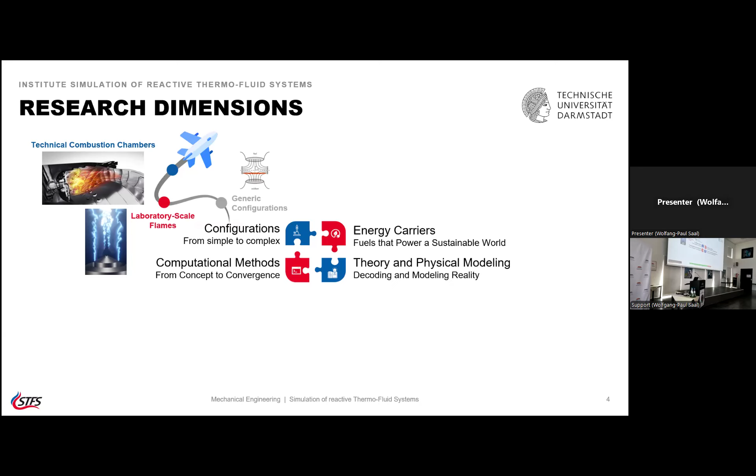We look at this for various energy carriers - fuels that power a sustainable world. They can be solid, liquid, gaseous, and also metal. Metal, of course, is a solid, but can also become liquid and gaseous in a flame. Today, I'll mostly talk about hydrogen as one of the most prominent energy carriers for future energy conversion and transport for the chemical industry. Hydrogen is a key component here.

The way we do this is by computational methods, from concept to convergence. Today I'll mostly be talking about HPC, quite obviously at a ParCFD conference. But all this computing power doesn't help you if you don't understand the theory behind it, the physical understanding. Today I'll mostly talk about direct numerical simulation and a little bit about large eddy simulation of reactive fluids. This is what we're going to talk about.

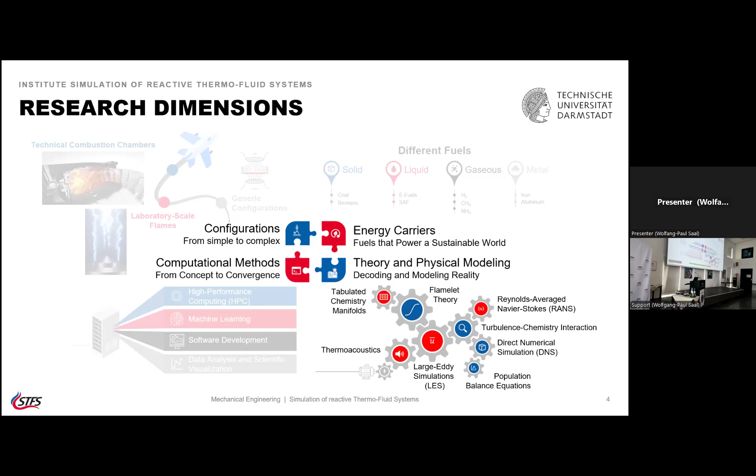Then I thought, how do I structure this talk? With the messages I want to carry across, I have four key messages and four parts to my talk. The first is: how has reactive CFD catalyzed combustion, coming both from fundamental research up to product development, looking at real systems? Then, since I want to talk about hydrogen, I need to answer: how can hydrogen help combat climate change? Why is it important for the energy transition? That's the second part.

The third part is that we're facing almost disruptive change when it comes to computer hardware, so the question is how the next generation hardware can be exploited to answer the scientific questions we have. This brings me to my fourth key message: how can HPC accelerate, in a sense, time to solution or time to scientific discovery, for hydrogen combustion. So these are the four things I want to talk about.

Let me start with what has happened in reactive CFD - a little bit of a view back at where we are and where we need to go. Now, reactive CFD - you heard I was also in industry, but now I'm back for more than 14 years. I'm back to academia now.

Reactive CFD is an important part of computational engineering in a broader scope. For me, computational engineering consists of two parts. The first one is that I need physical understanding - that's a little bit of the engineering part.

In terms of combustion, you need to understand how a flame structure looks like. For example, you have a thin layer, 100 micrometers thick only. How does the temperature evolve from 300 Kelvin to 2000 Kelvin over a distance of 100 micrometers? How does species evolve? How are pollutants formed? All these things - you need physical understanding to do this.

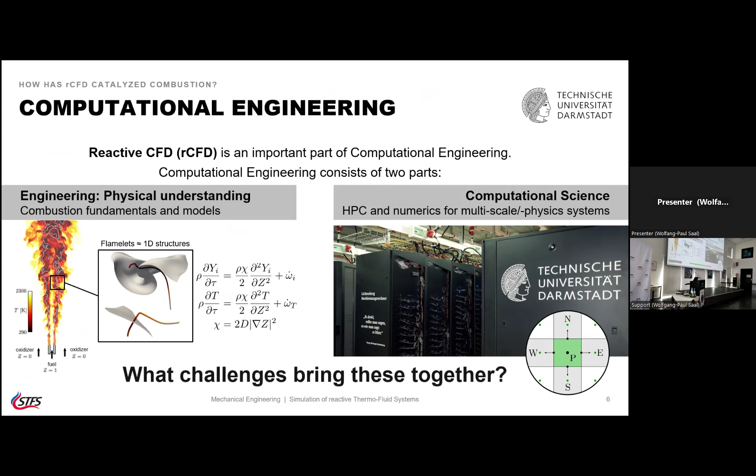And of course, you need the bridge to HPC. You need special numerics, and in the case of combustion, you really need numerics and HPC methods that can deal with multi-scale and multi-physics systems. Since probably many of you are more in the non-reactive CFD part, I'll try to explain a bit what our challenges are in reactive CFD - these are the challenges that bring these two things together.

Now let's look at a real aero engine - that's an LES of an aero engine. One that is actually flying, probably not designed by CFD, that's a Rolls-Royce BR710. You see here an LES, not a DNS, of these temperature fluctuations.

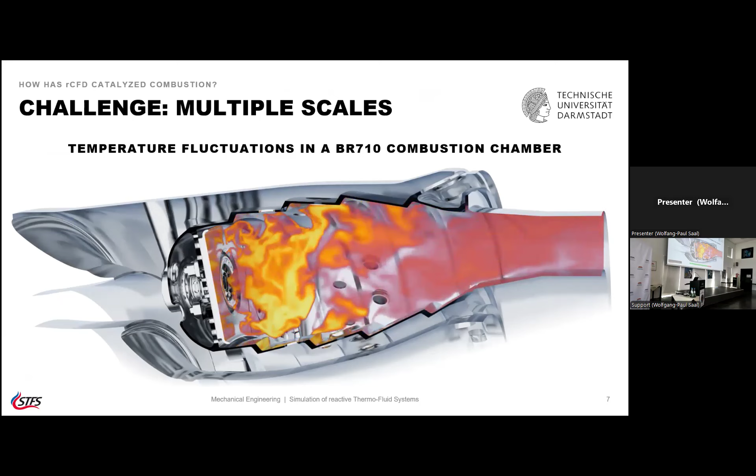Now of these real systems, meter size, you want to look at what scales are involved. Let's look at the different scales at a temperature snapshot here. When I look at the combustion part - let's say that would be our LES grid - you look at flame thicknesses, that's where the entire combustion physics takes place. We say that's a flame thickness, and under these conditions, that's 100 micrometers or sometimes even smaller.

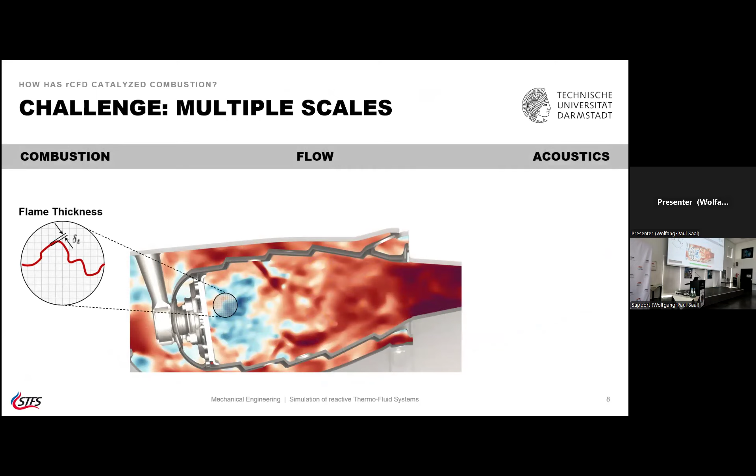Now you compare this to the fluid mechanics scales. In fluid mechanics and turbulent flow, we usually say the smallest scale we have are Kolmogorov scales. What you find under technical conditions is that the Kolmogorov scales are usually much larger, or at least larger, than the flame thickness. So everything in terms of physics that happens in a combustion scenario happens below the Kolmogorov scale.

So in terms of resolution, when you go for a DNS of a turbulent combustion system, it's not sufficient to go to Kolmogorov scales - you need to bring another 7 to 10 grid points into the reaction zone. That's why a combustion DNS and a typical fluid mechanics DNS have different restrictions. Keep that in mind.

But on the other end, this isn't just about resolving - as a CFD person you'd be used to resolving in a DNS from Kolmogorov to the integral scale, but sometimes that's not enough. If you look at thermoacoustics, you get physical wavelengths that are beyond the integral scale, so these are sometimes also scales you have to resolve. In terms of multi-scales, combustion is really fascinating - sometimes it also gives us a lot of headaches, but in terms of scale separation, that's quite a challenge.

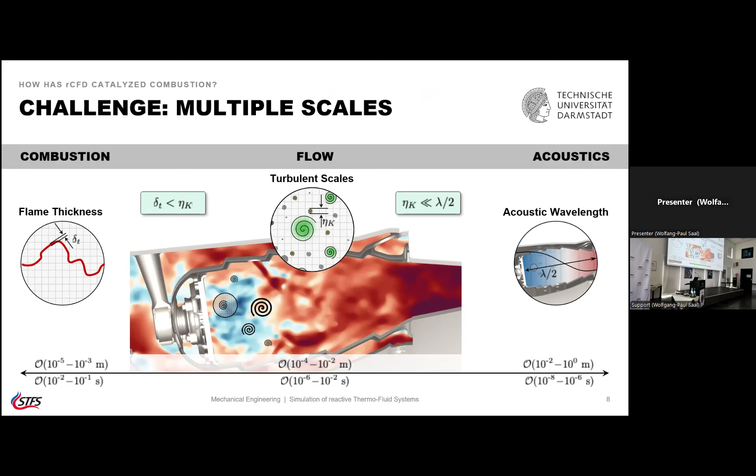The smallest nanoparticles that you get here are around 1 to 2 nanometers, the first subparticles that you get. So this is also something you have to resolve.

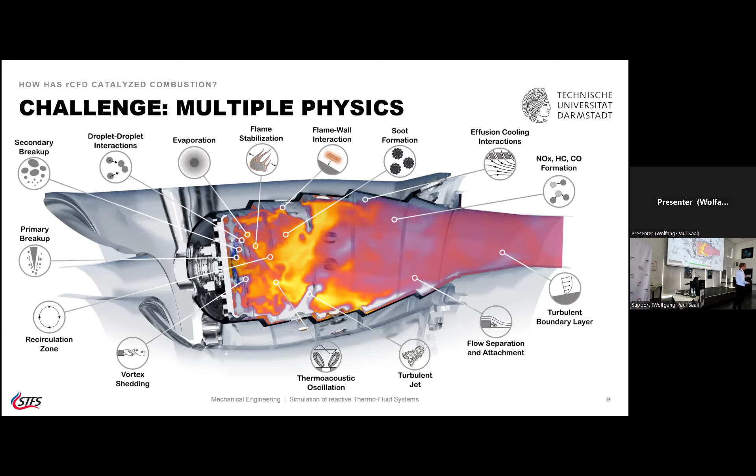Now looking at how you can do this, I said this at the very beginning, you want to make sure you have a systematic approach. So we start with fundamentals, really basic research, where you understand in laboratory type flames what the turbulent flame structure is. Then having learned a bit about turbulent flame structures, you go into something application oriented, like a combustion chamber that operates under pressure but you still have optical access. You can still see the flame. You go in with laser diagnostics and you can simulate this and validate step by step your models, because in the end, if you go to industry relevant configurations like the one you've seen before, you cannot validate a model in such a configuration.

You don't have the data to do this. You can evaluate whether the model is fit to do this, but you cannot validate a model. So the validation part goes here, and here it's more evaluation, looking if it can solve a practical issue. So this is really an engineer's type of workflow where you go from simple to complex, looking at all these unit problems, and all of this needs a unit test in a good software framework to handle all of these things.

So this is where reactive CFD is, and that has been developed over decades. This is not something one single person can do, but the entire research community has been working on this, and now we're at a point where it has become an indispensable tool for both fundamental research and product development. It's a multi-scale and multi-physics process.

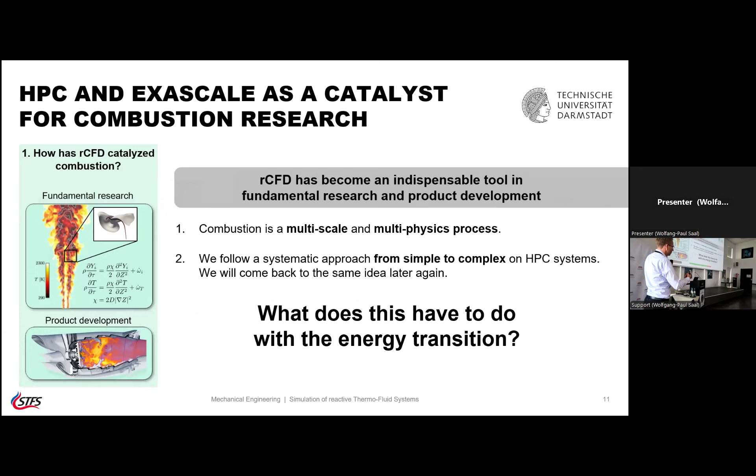Well, the question is, all of that talk didn't say anything about the energy transition. So that's the next thing I have to explain a little bit, where this becomes important. Now, the energy transition and the hydrogen part is my key message 2 and 4. So let me talk first about hydrogen and how hydrogen helps in the energy transition that we're entering into now.

There are tons of numbers, tons of politicians giving you insights on what needs to be done. We all have consensus on what needs to be done - reduce the use of fossil fuels - but there is no consensus on how we do this. There is, however, the International Energy Agency, which is widely accepted, and they put out numbers every year. This is called the World Energy Outlook. Now let's look at what they're saying.

If you look at the so-called stated policy scenario, this is what we already implemented to do, and you look at what the energy composition is in 2050 - that's the year where we want to be net zero, net zero CO2. That's the big goal, in order to limit the temperature increase. So this is really what we do.

And if you look at 2050, you see, don't want to go into all the details, but there's oil, natural gas, and coal. So these are fossil fuels, and this is one thing you want to get rid of if you want to combat climate change. So this is what we already do.

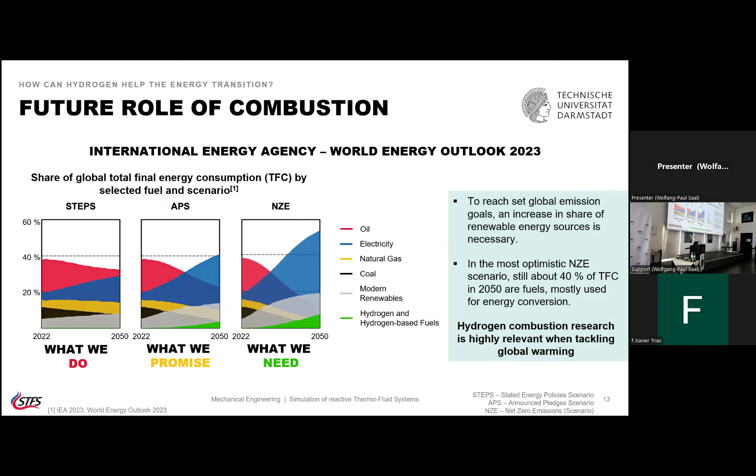That's not something that will be a niche at some point. That's really of high economic relevance. Seeing that hydrogen and hydrogen-derived fuels are growing, it's very relevant to look at this. So combustion is not going to phase out. Combustion is in fact becoming more and more relevant these days, because we're not talking about improving a little bit of 1% efficiency anymore. It's about designing systems in a disruptive change to work with hydrogen. So it's really an engineer's dream. You could start with a white piece of paper and do everything new.

One example is hydrogen-powered engines by 2035. That's the promise Airbus made. So by 2035, we're going to fly with hydrogen. This was just launched a couple of years back, and there's also a roadmap in between.

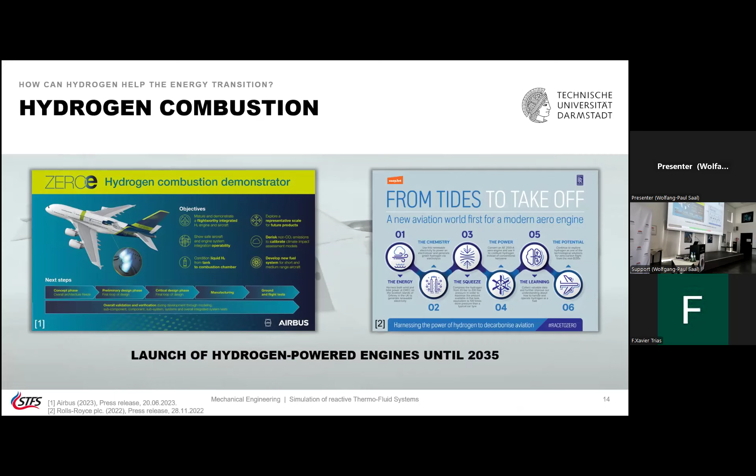When we started working with Rolls-Royce on these systems a couple of years back, we didn't even know whether we'd burn the hydrogen pre-mixed or non-pre-mixed. So you really start with a white piece of paper, knowing that in 15 years we have to fly. That's what I tell my students - that's an engineer's dream. It's not about talking to people who say we always did it this way and don't want to change. Here, the change is disruptive, and that's where engineers are needed.

So when you say hydrogen - everybody had basic chemistry - you could say hydrogen is the smallest molecule. That's where you start with hydrogen on the periodic table of elements. So H plus H is H2. That should be a simple fuel, and the chemistry, in fact, is not so complex compared to other fuels.

But hydrogen is highly reactive - you know this from basic chemistry class maybe. We usually measure this with laminar burning velocity, which is the front speed of a flame moving through a stagnant, pre-mixed medium. And you compare this to methane.

Here's how much fuel to air you have - one means stoichiometric conditions, here you have more fuel, here less fuel than needed. For methane, the basic ingredient of natural gas, you have limited flammability limits and a fairly slow flame. With hydrogen, it basically burns all over the place - whatever you mix, it burns, and it burns very fast. This also comes with safety implications around explosibility and things like this.

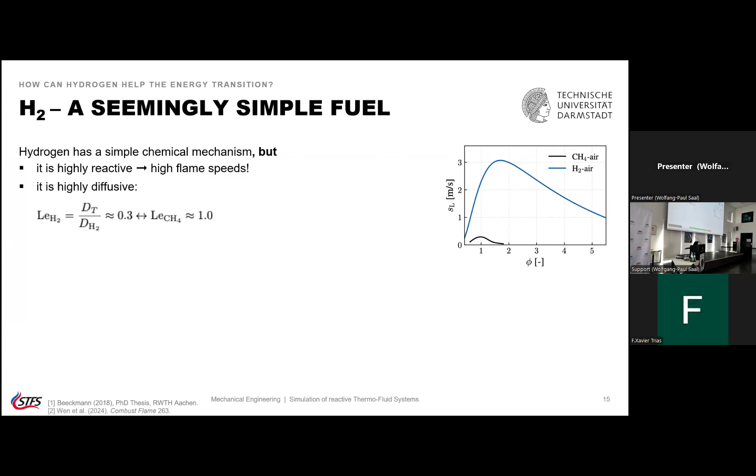So it's highly reactive and highly diffusive. For an engineer who ever designed a sealing, the most challenging sealing you can get is for hydrogen, because it's a small molecule - it can always go anywhere. This high diffusivity also has a drawback, and as some of you have seen in this mini symposium before, these lean premixed hydrogen flames feature what we call thermodiffusive instabilities, because they're so diffusive. I'll come back to this later.

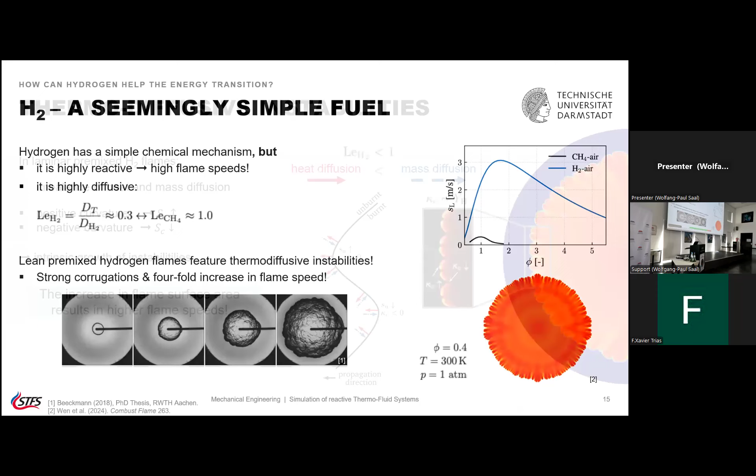What that means is: you mix hydrogen and air in one cell, ignite it in the middle, a laminar flame develops, and this laminar flame breaks up. So this is not a turbulent flame - this is a laminar flame that by itself is unstable and creates more surface area. I'll talk later about where this comes from, regarding curvatures in these flames - I'll skip that for now. But what I want to say is that it's not only turbulence that creates more surface area and curvature; here, both the laminar and turbulent parts create more surface area.

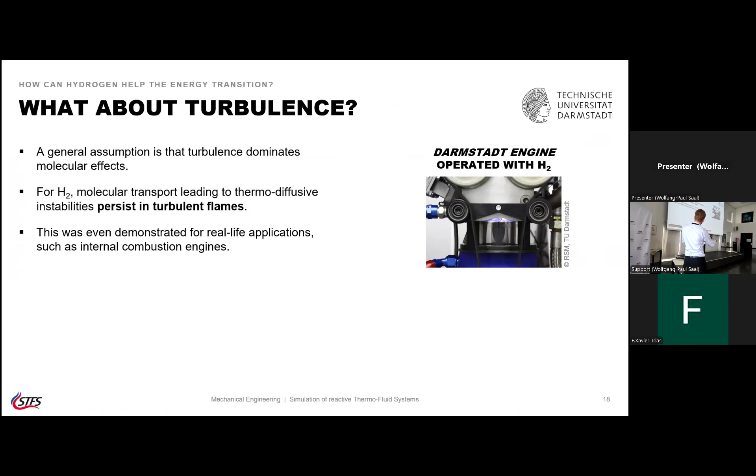And in this engine, optically accessible, we can look at the flame front. This is from our partner institute, RSM, Andreas Dreizler in Darmstadt, and they have visualization of a turbulent flame inside an engine. This is the flame propagating from the top towards the piston.

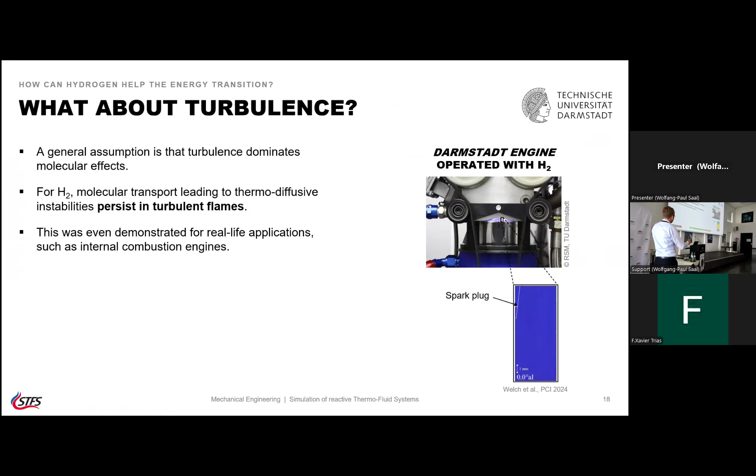When you look closely at these flame fronts, you can see the thermodiffusive instability under high pressure, high temperature conditions. So this is not something that appears in just a little bit of a laboratory academic setup. It really happens in real flames, and this is something we have to worry about.

So the problem is that all current combustion models basically neglect this effect. That is an issue, and that's why we have so many hydrogen projects at the moment.

In order to understand this, you need HPC, and this is something from Aachen, where they looked at different fuel-air equivalence ratios, different pressures, different temperatures. Where does it appear? You see sometimes it's more pronounced, sometimes less pronounced, these thermodiffusive instabilities. Obviously there is an effect of many, many parameters, and you need to understand this.

HPC is the way for scientific discovery here, because you need to understand what happens under technically relevant conditions, and you need HPC to explore this. You cannot do an experiment for this. You don't have the 3D unsteady resolution that you need, and the only way you can do this is by high performance computing.

Then you can build models. If you compare a case where you neglect these thermodiffusive instabilities, you would get a flame that looks like this, very long. You include the physics now, and you see the flame is much shorter. Obviously, this is the way we need to go.

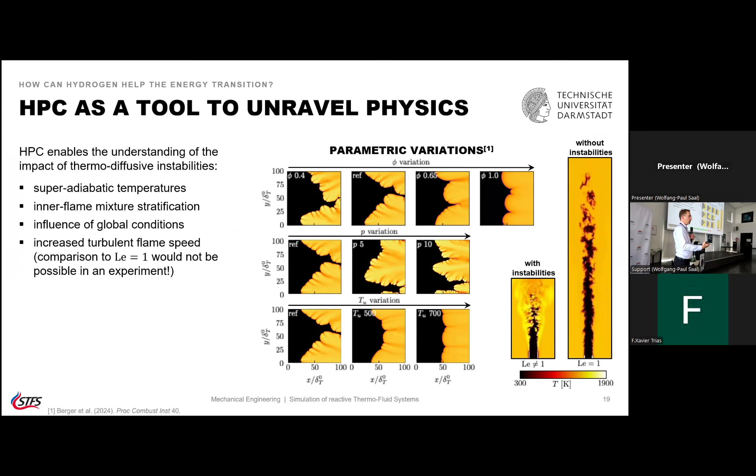The Lewis 1 approximation, which means the heat diffuses with the same speed as the hydrogen, and this is what we usually assume in hydrocarbon flames, that would fail miserably for hydrogen. So all the models we developed over decades for hydrocarbon flames, I wouldn't say useless, but they can be considered a good starting point. But in model development, we're looking at almost disruptive changes, where what we did over decades is not working for this fuel anymore.

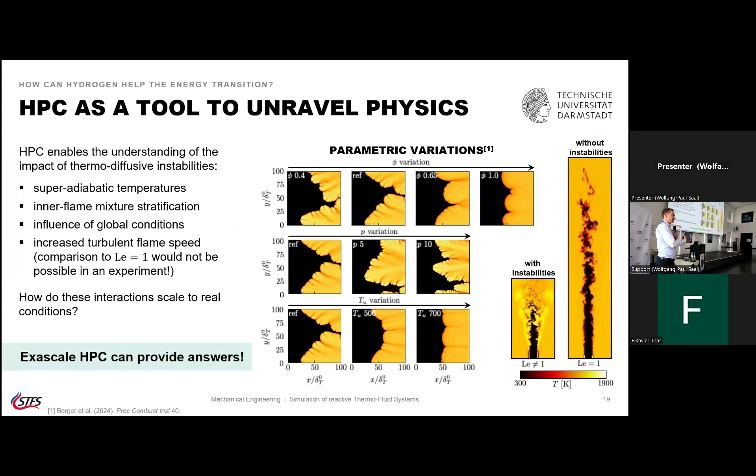So the question is, how do these interactions scale to real conditions? This is again where exascale HPC will provide answers, and I'll come to the exascale aspect in a couple of minutes. All right, so that tries to answer the second part.

Hydrogen, can it help in the energy transition? Well, hydrogen is a key enabler in the energy transition. The challenge, or maybe the good news, is it's so different that we have probably a decade of work ahead of us. The combustion characteristics are very different from conventional fuels. It's really something we need to do, and where the scientific community has to provide models that can be used when a company designs an aero engine, an internal combustion engine, a household burner.

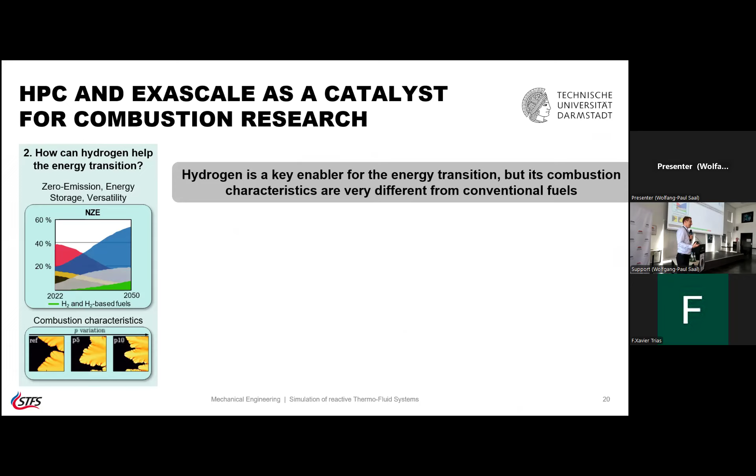You know that we're building gas turbines in Germany, hydrogen ready, but the systems are not hydrogen ready yet. That's why we are entering research collaborations right now. Not because we don't understand how hydrogen burns, but what about flashback? I'll show you one example of how flashback can look like. There are many things in reliability and safety we need to address when it comes to hydrogen.

Because hydrogen is highly dynamic, all the hydrogen flows are intrinsically three-dimensional because the instabilities are three-dimensional, and you don't even have to go to turbulence. Even the laminar flames are three-dimensional. And we have a basic understanding of the underlying phenomena, which is good. So we do have a physical understanding.

We are not able to predict it under realistic conditions at the moment, where you cannot do DNS. If I can do DNS and I have a code to do it, I wouldn't say it's plug and play, but you still have to worry about terabytes and terabytes of data. But we're not even there yet. So that's what makes it so exciting, at least for me, that I do something where we can explore something new almost every day.

So the question is, how can HPC and the next generation of hardware contribute to answer these questions? What I want to talk about a little bit is how aspects like heterogeneous computing, GPU acceleration, maybe even green computing come into play.

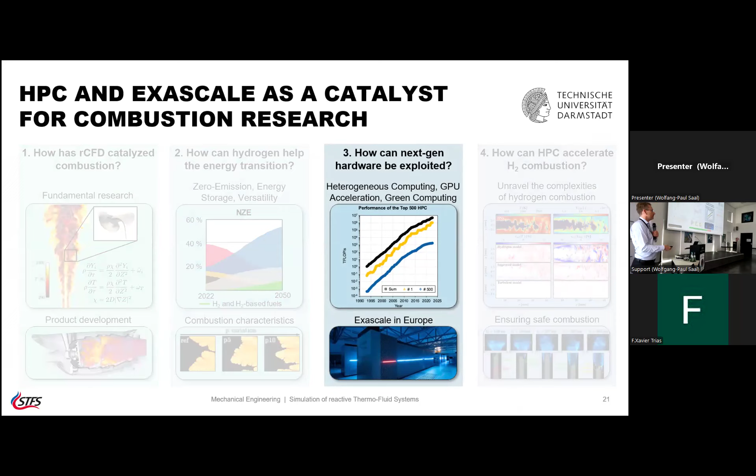And exascale, we're at the right place. We'll have an exascale computer in Jülich very soon. So the question is, what do we do with all this computing power? I do have an idea, and that's what I want to talk about.

Now, before I do this, I want to give you one outsider's view, because I'm a little bit older. I started out, when I did CFD, being on proprietary Unix systems. I did system administration on HPUX systems, all these different Unix variants. Then there was, and they all had their own processors, something you probably cannot imagine these days now.

So HP, SGI, Sun, they all developed their own microprocessors. They had their own Unix, their own microprocessors, their own compilers. Then Linux came along, BSD as well. I started with kernel 1.6, I think, so that's how old I am. But then everything became a shift.

So we went away from these RISC-based systems to CISC, and that was commodity hardware. We could benefit as an HPC community from commodity hardware. We now had an operating system that can operate it, and compilers that can operate on these CISC systems. Then stream extensions, vector things, all came into play.

And as you all know, we're entering the next phase of disruptive change. The other one was not disruptive. Now the next one is disruptive, with GPUs. But you can think about what other disciplines can say, okay, I see all this computing power makes sense.

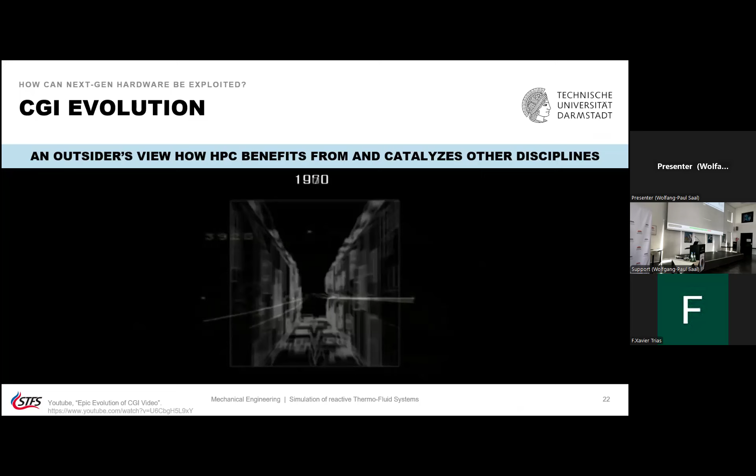And when you look at CGI, computer-generated imagery, some of you might recognize some of these movies, but just look at how special effects developed over the years. This is how special effects looked in the 60s. Actually, I didn't see that. The 70s, looks not so fancy. The 80s, the first time you see rendering, volume rendering and all that stuff.

Jurassic Park, I just watched with my kids, they still love that. See all these movies, so this is how computing power helped as well. Lord of the Rings here - this obviously doesn't carry across under these light conditions. Star Wars, that's important for me. I think this was Day After Tomorrow, and Marvel, of course, I have the pleasure to watch with my kids as well.

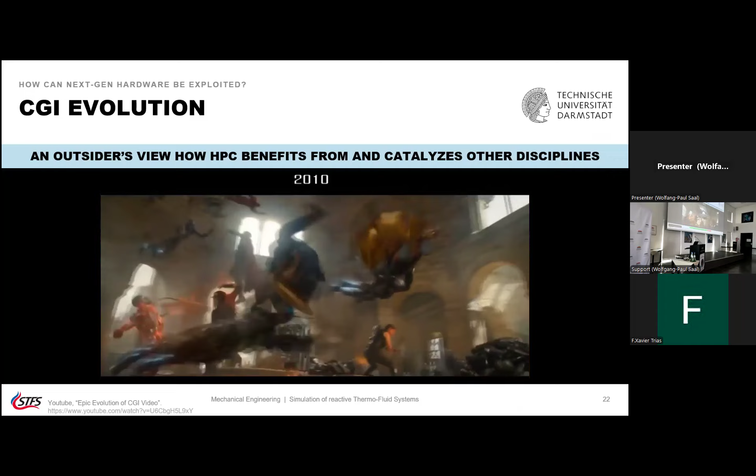So all of this shows you how computing is not just for HPC. I mean, we have to take the position that we benefit a lot from HPC. And you know, a lot of these things were all SGI made - Pixar was probably the biggest operator of SGI machines at some point because they had the graphics card. Now we're back thinking about how do I use GPU or graphic card accelerators for CFD.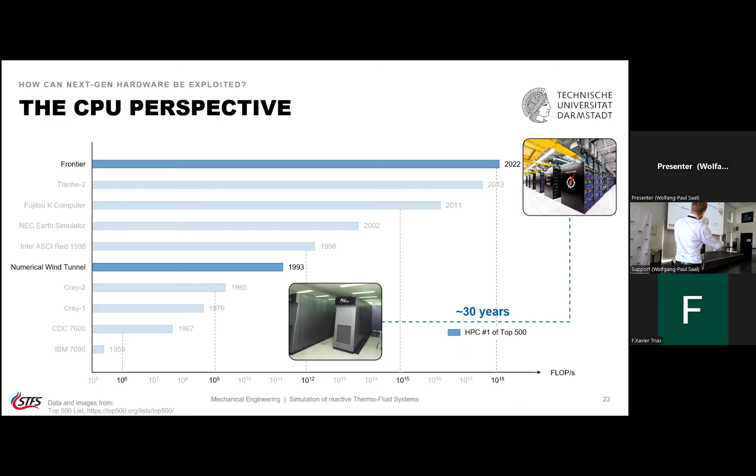Now, interestingly enough, that's not all. Let's look over 30 years. That was the Numerical Wind Tunnel here. That was over 30 years, how many orders of magnitude we crossed in this time.

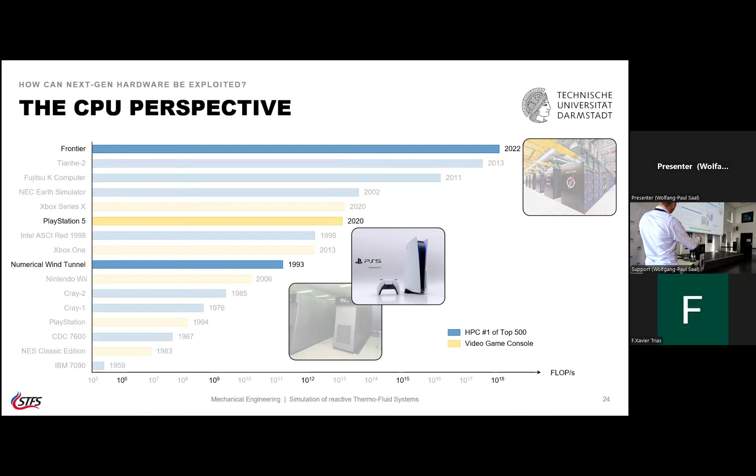Now, I would like to enlarge this picture a little bit with video game consoles, because these are now having a lot of floating point power. And of course, this is not entirely correct because it's also GPU sometimes, but stay with me for a second. You see here that the PlayStation 5, 2020 - this is about the shift you have from the fastest computer, the ASCI Red, in '98.

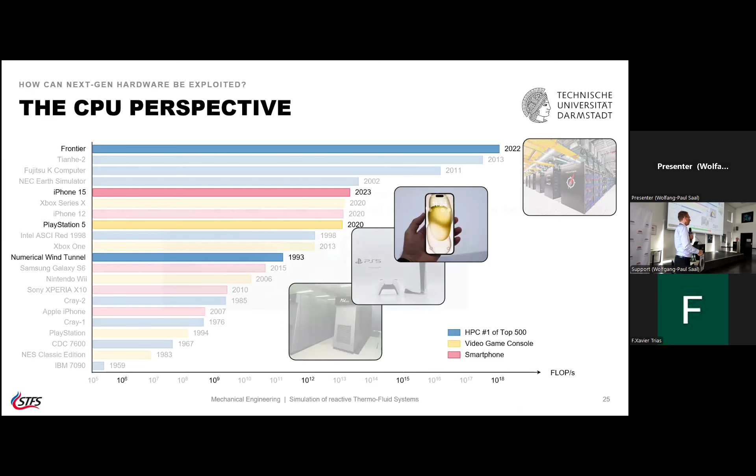Now, obviously things have changed, and it's not so easy anymore to use all of this. Let's look at Frontier here, the top #1, with the Numerical Wind Tunnel - 140 cores, a couple more now, 1.2 exaflops. So that's quite a development. You see here, that's always the top one.

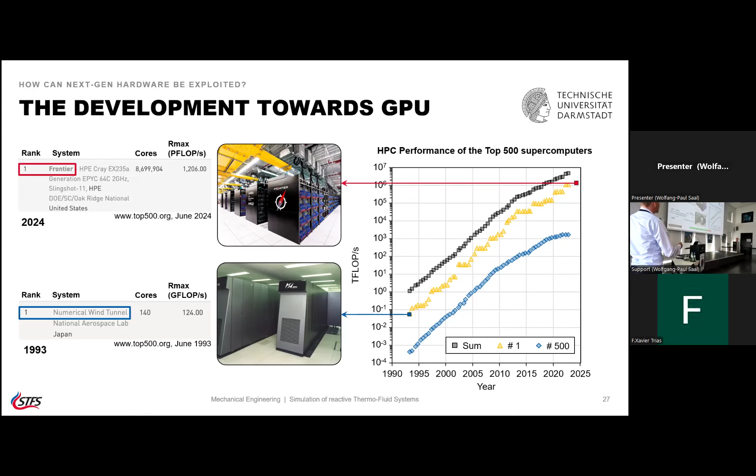This is the sum of all the top 500. The top one you already see makes, well, it's always sort of the hero system. It's not just one among many, it's just the hero system. And if you look at the top 5 nowadays, except for number 4, you see all of them are basically using accelerators, AMD, Intel, NVIDIA, AMD. So it's quite clear that things are changing.

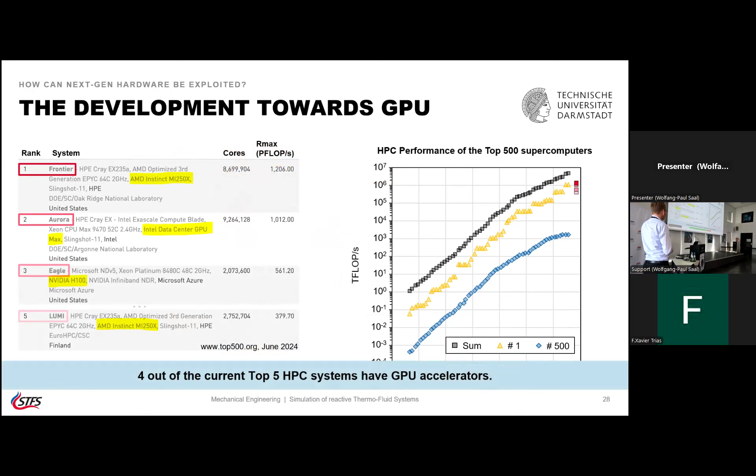So computing power, exascale, means new hardware. And the question is, does that matter to us? 4 out of 5 of the current top 5 HPC systems have GPU accelerators. And you can look a little bit closer. If you look at the top 500, how many of these have accelerators? You see this is a very clear trend. As of now, in the current top 500 list, 192 use accelerators.

So the hardware is getting increasingly complex, it's heterogeneous, we have new memory systems and hierarchies, everything is implemented, but then do our codes work on these systems? That's the big question. And then the question would be, what do we need?

From a CFD perspective, you can always ask how things developed over the years: flops over network latency, flops over memory latency, flops over network bandwidth, and flops versus memory bandwidth. Being in CFD, this last one is really the most relevant number for us, we say memory bound, etc. But unfortunately, this is the one that also has the smallest increase, so we don't benefit as much as we could.

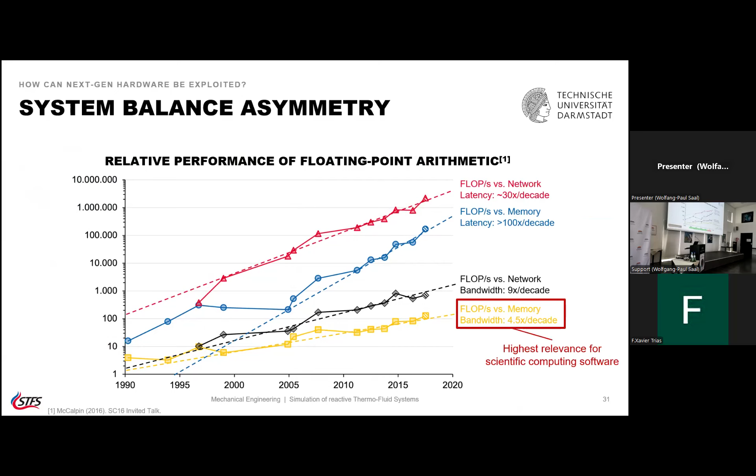That's the storyline here. So we probably have to think about, with these disruptive changes, do we need to do something different? And another thing we shouldn't forget is if you look at hardware specifications, what NVIDIA or AMD now have in terms of GPUs.

As a CFD community, we're very much used to saying we do everything in double precision. Okay, that's a long time ago. I'm very old, and for a long time we had 64-bit processors with registers to handle that. A very long time ago we had 32 bits, but now everything is 64. We could do this, but now the problem is that the new hardware isn't made for this. The floating point performance you get on double precision is much larger when you go to single, or even to half precision. That's something I've never seen in my CFD, but you trade it in for floating point operations.

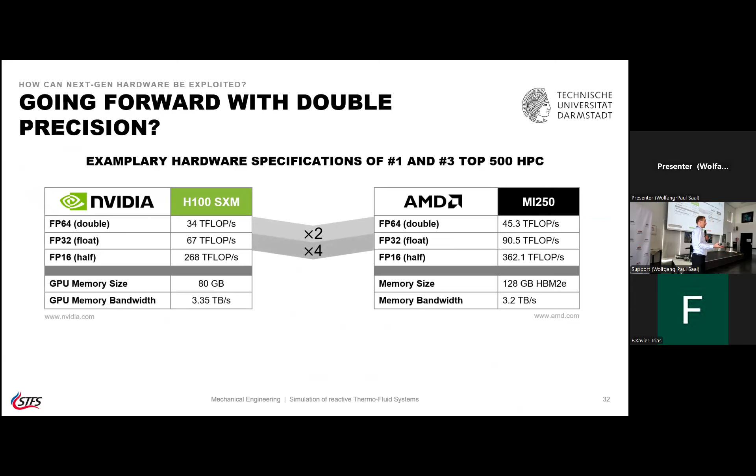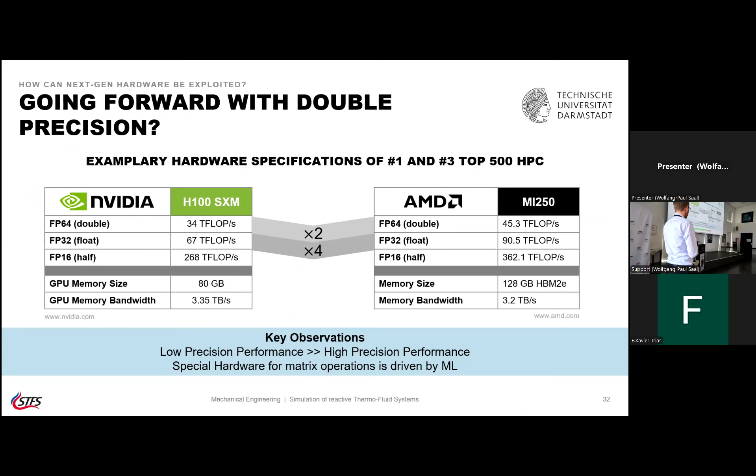So relying on the notion that we always need double precision becomes an issue. For other machines it wasn't an issue because the hardware was designed for it. That's not the case anymore. We have more low precision performance, because this special hardware for matrix operations is driven by machine learning. So current hardware development is driven by machine learning and artificial intelligence.

What we usually need is high memory bandwidth, high floating point performance with 8-byte precision, or at least 32 or 4-byte, high memory capacity, and a fast interconnect. What the hardware provides us is single precision hardware, and they drive GPU accelerated hardware. This is really a contradiction. This is not what we need.

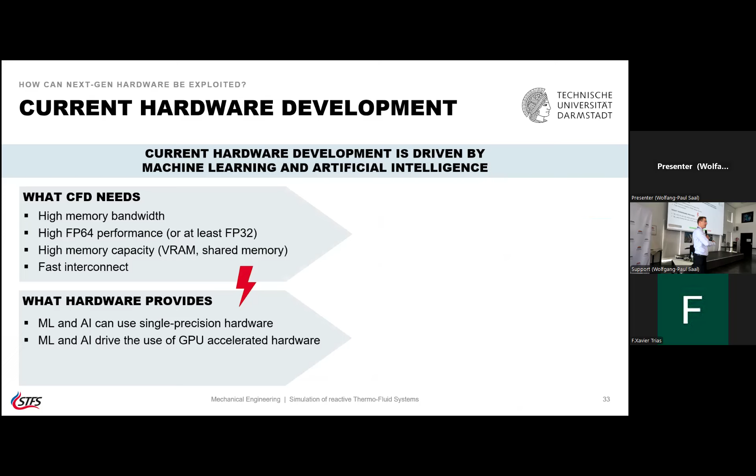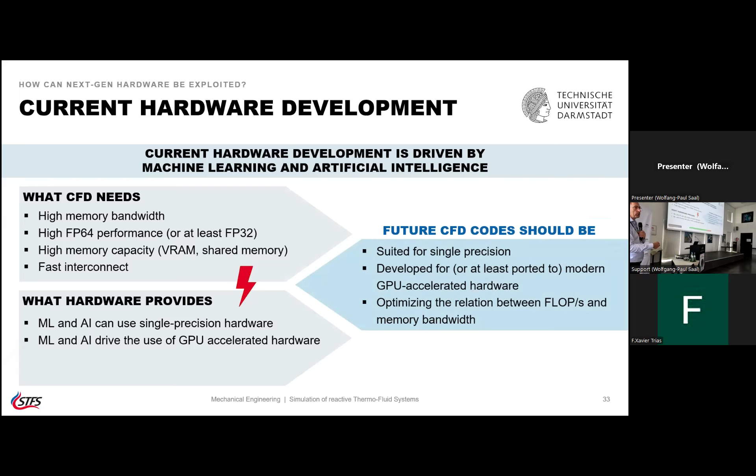So the question is, do we rely on the old hardware? Do we say we don't change anything? Or is it really up to us to say the future CFD code should be suited for single precision, at least partially? We need to develop them for modern GPU accelerated hardware, and we probably need to optimize the relation between flops and memory bandwidth. That's probably what we need to do. And that is not just a single rewrite of a few lines of code after profiling.

What we do have are legacy codes, because multi-scale, multi-physics isn't something you write in an afternoon because you're bored. There are decades of development in these legacy codes, widely adopted by the scientific community, large multi-purpose codes, and in Europe well-established codes that have been run. Some of them are ported to GPUs, but mostly it's CPU-based. These are just some of them.

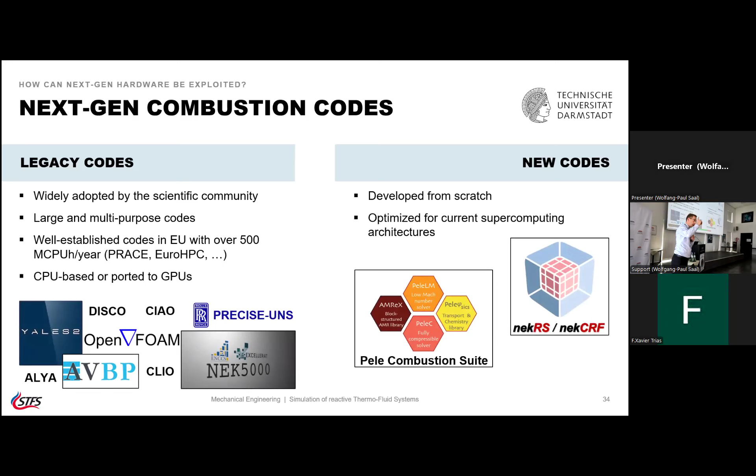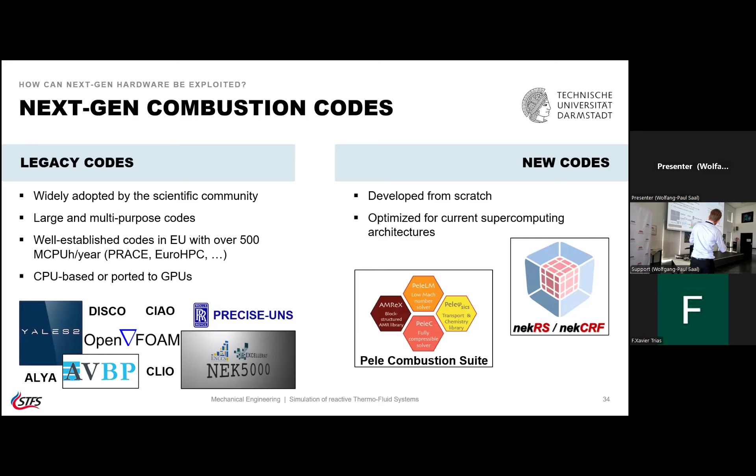The new codes are mostly developed from scratch, optimized for current supercomputing hardware. The two we're looking at in the framework of numeric combustion are NekRS, with the plugin for CRF for the combustion part, and the Pele combustion suite that you see here. I'll spend a little bit of time on NekRS. It's the flow solver, a spectral element code, for complex geometries.

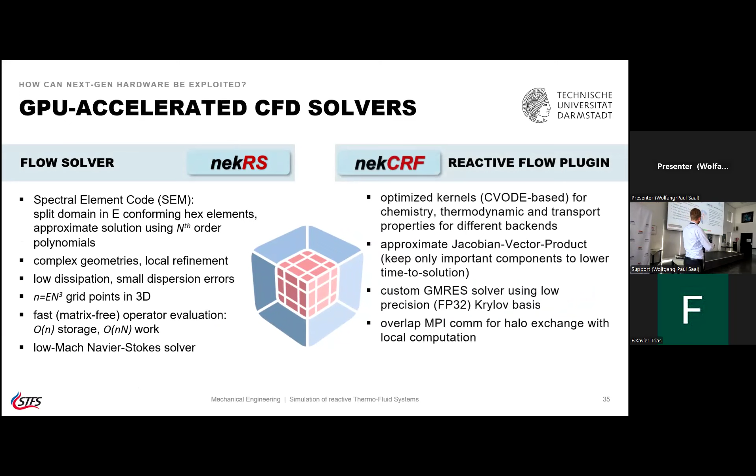I don't want to go into all the details here, but you already see where we're going. It's matrix-free operator evaluation, which has a lot to do with storage and work. It's a low Mach number solver. For the reactive flow plugin, we have optimized kernels to handle the stiff chemistry systems, because the chemistry is also stiff. The Jacobian's eigenvalues are very far apart, and that means you have to have special ODE solvers for this.

Developed over many years, this code now needed to be ported to GPU systems. Some aspects include a custom GMRES solver that takes into account FP32, 4-byte precision, and overlapping MPI communication.

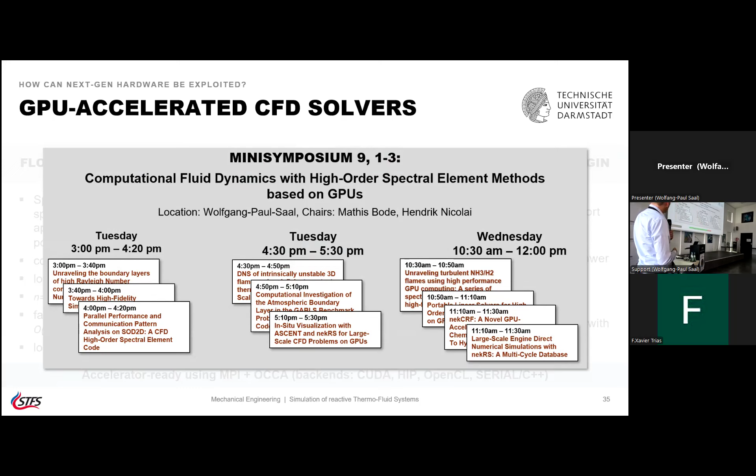If you want to know more about this, there's a mini symposium over the next two days. You see the talks listed here, and you're highly invited to come look at these interesting talks. It's called Computational Fluid Dynamics with High Order Spectral Element Methods based on GPUs. We're not looking exclusively at combustion, but a lot of it involves bringing in combustion. Please join us if you want to know more about this.

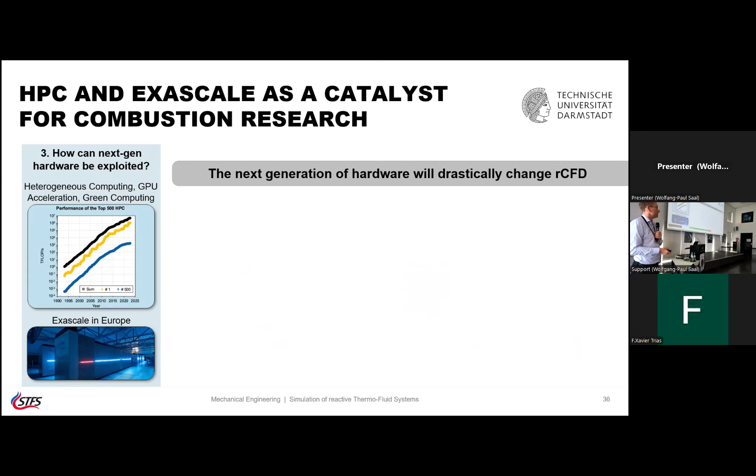Now, the third message: how can next generation hardware be exploited? I'd say it will drastically change reactive CFD. It's almost disruptive, I don't use that word often, but for us it is. The systems are shifting strongly to GPU. So if you want to do bleeding edge combustion research, you probably want to conduct it on a bleeding edge novel system, and you need a new code.

You could say legacy codes are best ported to GPU architectures, while new codes are developed and optimized specifically for novel computing architectures. We will still keep the other things, because again, you don't do this in an afternoon. Multi-physics, multi-scale approaches with decades of experience will still be there, and we will still have CPU systems, but there will be a shift, and that takes time. I think it's important to acknowledge that we need to start right away, or we have already started.

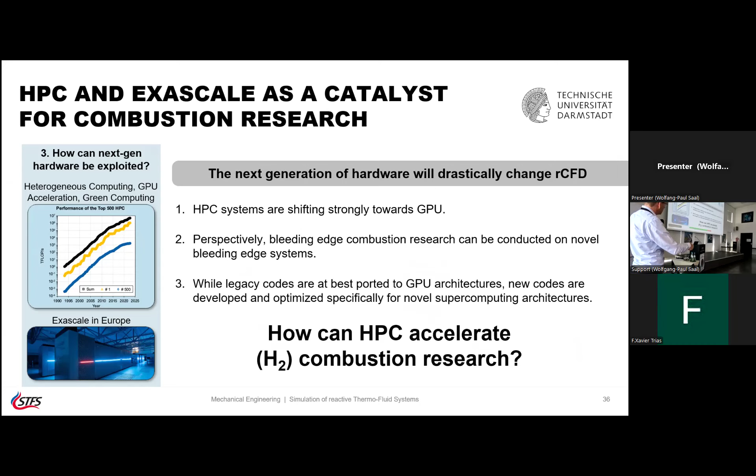Now, the last thing I want to talk about is how, with everything I've discussed, we can accelerate H2 combustion research. In the end, I want to give you a couple of examples of where we are standing and what kind of physics we need to resolve.

Again, I'll show my simple-to-complex animation. We start out with fundamentals, understanding how a flame stabilizes. Then we move to an application-oriented, pressurized combustion chamber with optical access, looking at pollutant formation, or how effusion cooling air blowing out interacts with the flame coming down. Finally, we go to an industry-relevant configuration.

Now thinking about how that would look, there was a slight animation. Now we have a hydrogen edition of that workflow. Obviously we don't have CO, we don't have soot, but we have other things to worry about.

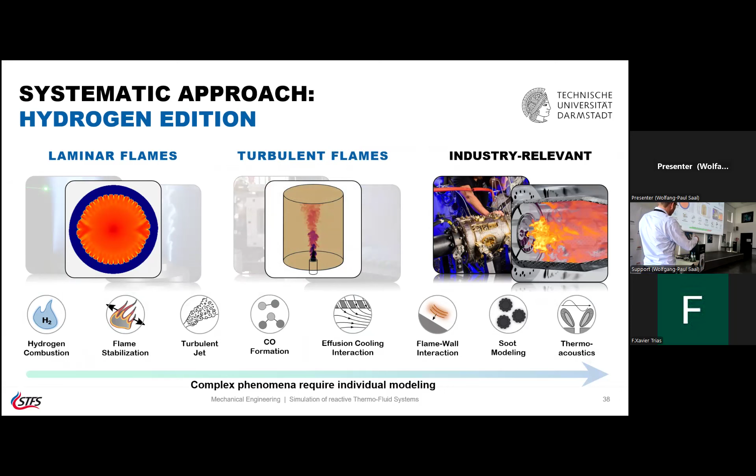So we have to understand laminar flames first, which we have not fully achieved yet. We have to understand how turbulent flames behave, and how linear instability interacts with the turbulent flame. Then we need to move to industry-relevant applications, and I'll talk about flashback under high pressure, which is relevant for safety operations.

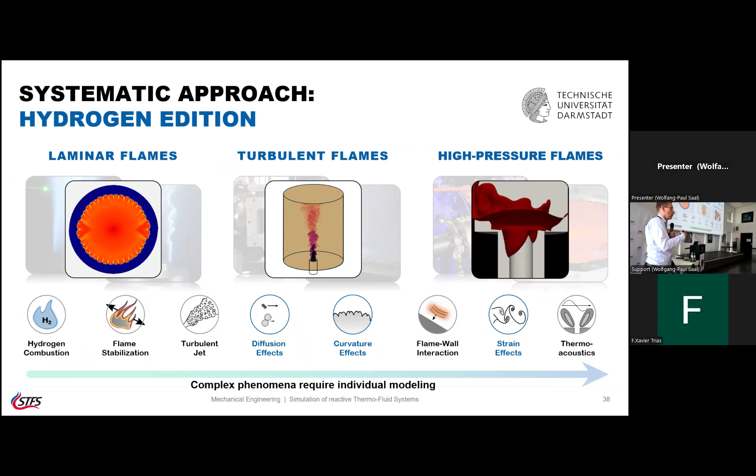In the end, you wonder how diffusion comes into play, how flame curvature comes into play, and how strain imposed by a turbulent flow changes the hydrogen flame structure. Things that were not so relevant in hydrocarbon flames become extremely relevant for hydrogen.

I'll just walk you through a couple of examples. Let me double check my time... okay, I'm good, I'm actually speeding up.

So that's the DNS of the spherical flame you saw. Why is that flame getting faster or developing these instabilities? It's the heat that the flame gives to the unburned mixture. Here's unburned, here's burned, this is the flame. You have a lot of hydrogen here that diffuses extremely fast to the flame, while the heat, which is high, the temperature is high here, is slower to get here.

That means if you have a flame front that is concave, it gets slower because the hydrogen doesn't reach it, and where it's convex, it gets faster. After some time, this leads to the acceleration and deceleration of the flame that you see. So this is what happens in these flames.

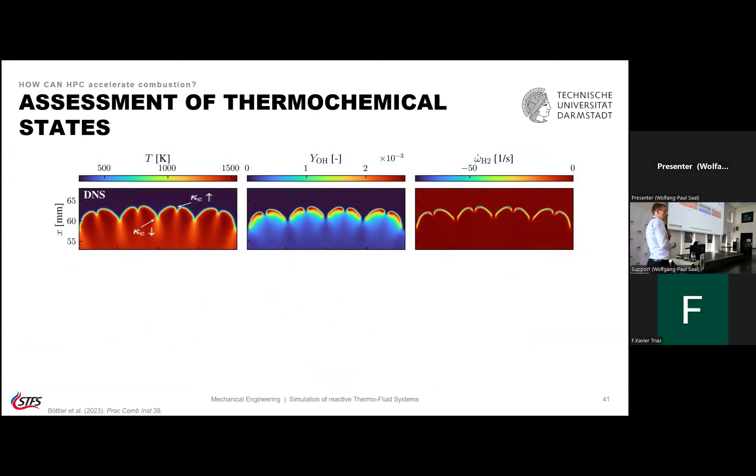You bring this in to build a model, since you don't want to do DNS every time. You look at the temperature, the hydroxyl profile, or the hydrogen consumption, and bring in one of the models we developed for hydrocarbon flames, apply the hydrogen addition, and look at the error in temperature, hydroxyl radical, or the hydrogen consumption rate.

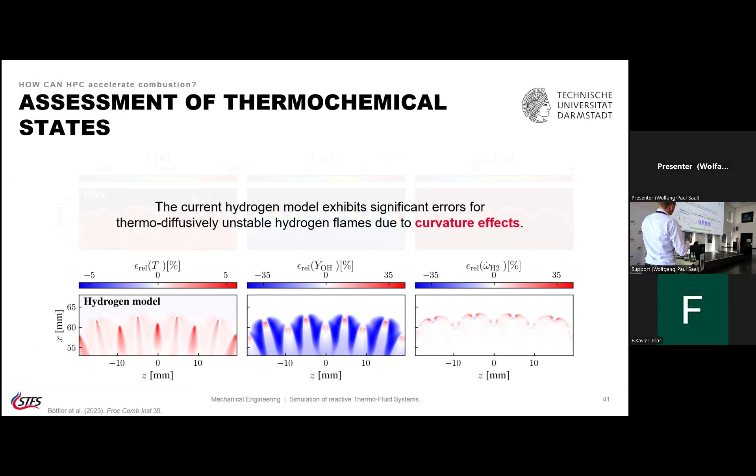You see there are lots of errors in particular regions, and then you figure out that you have to include the local curvature of the flame in the model. If you do this, you get a much better result, so this is the improved model with curvature included, much better.

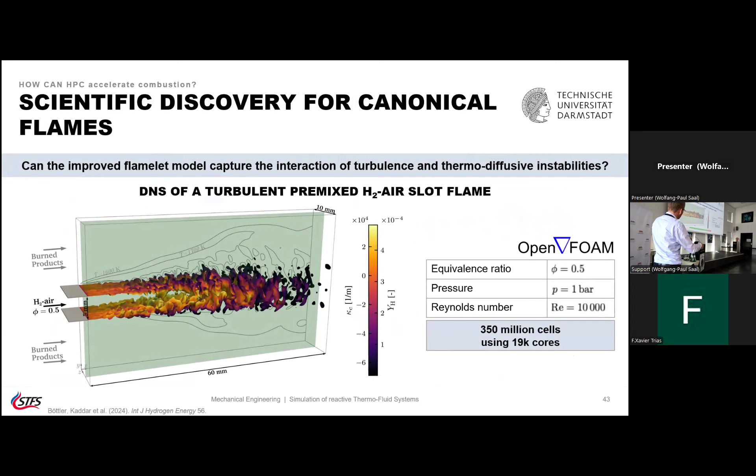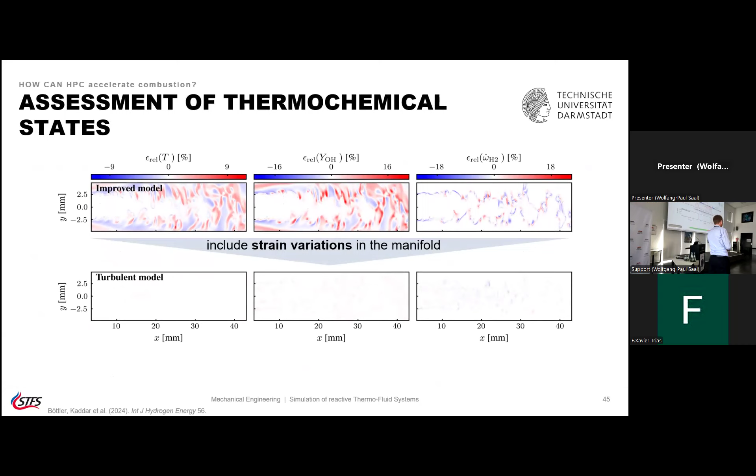You bring in the old model, obviously large errors. You bring in the improved model, still large errors. Then you understand that in the turbulent flame things have changed again, and you have to bring in the strain imposed by the turbulent flow. If you do this, well, our model isn't perfect, but this is just the beamer. There's still a little bit of discrepancy, but much smaller than before. So it's a qualitative statement I can make here, but it's much better. You have to really build understanding step by step how the model must be built.

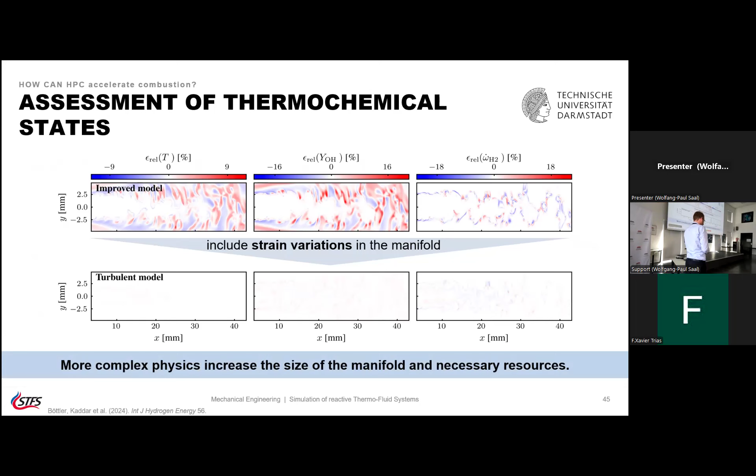More complex physics increases the size of the manifold. That's a bit of a technical term here, but it needs more resources. I'll skip over this for time.

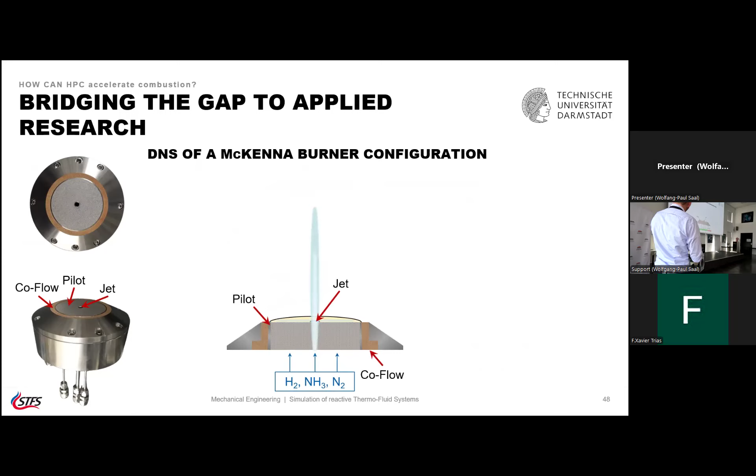a simplified configuration we do. That's a so-called McKenna burner, where you have a jet, a pilot, and a co-flow, and a turbulent flame in here. We did these with both OpenFOAM and NekCRF, same conditions.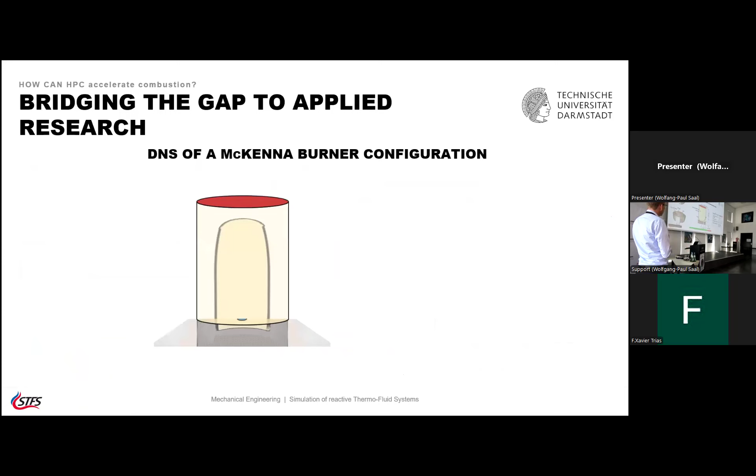Let's skip how we do the boundary conditions. Now let's look at what a legacy code and a new code do on the same case. With OpenFOAM, we ran that on 64 million cells, 40 micrometer resolution, 2,500 cores, and that was a time to solution of about 18 days. That was, I think, in Munich.

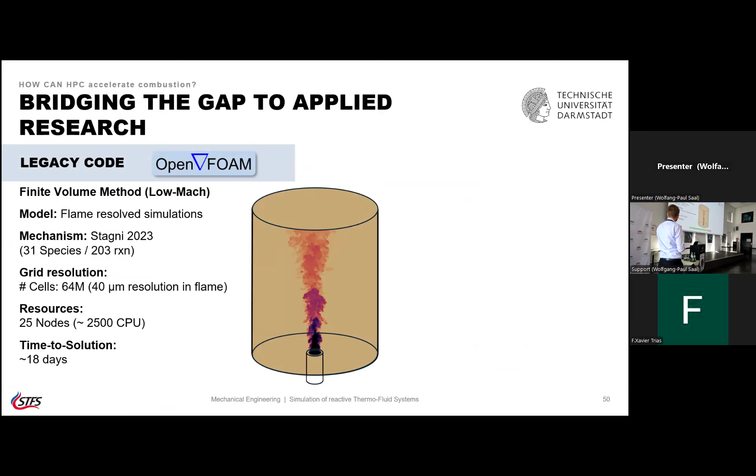Those of you who have done this will be surprised how fast you can get an answer if you have a code that can do it. Developing these codes is not a piece of cake. It takes time, and sometimes you're bug chasing for months. But we're getting there, and it's very, very promising.

The last example I want to give is flashback. Flashback is where you have a mixture coming up here, with a central bluff body. The flame is supposed to burn here, but unfortunately sometimes it burns back - that's what we call flashback. Very bad - if it happens once, the system is gone, so that is never supposed to happen. If it happens, it looks like this, because the metals here are not fit for the temperatures of a flame.

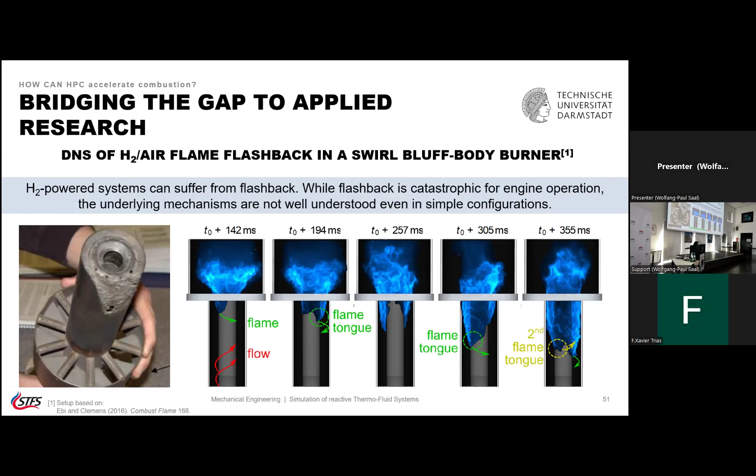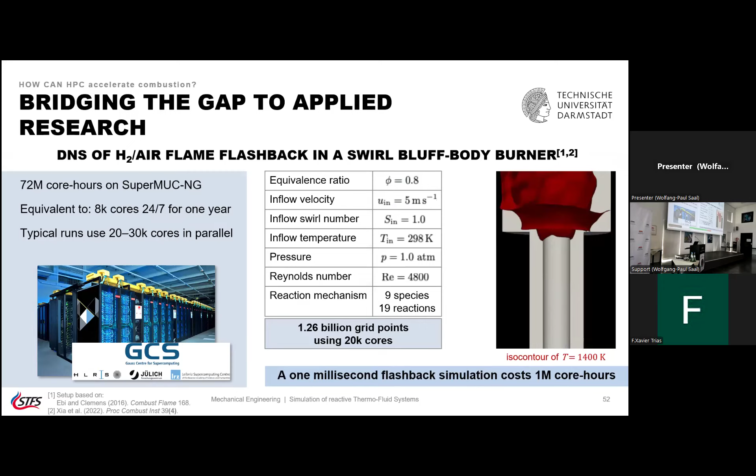They just melt - this is something you want to avoid. Avoiding it means you have to design a system that doesn't have flashback, which requires physical understanding of what is happening. This is one thing we ran in Munich, trying to understand this on 20,000 cores - that's a couple of years old now. But then you really see this creeping of the flame along the bluff body or central body, and you can understand what kind of fluid dynamics in front of the flame allow the flame to actually go down. This is an HPC thing, very difficult to do in experiment.

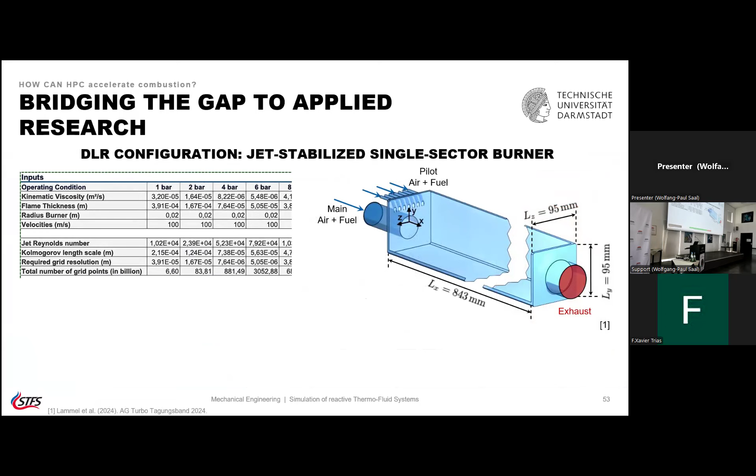And that opens up the next one - this is really hot off the press. This is what we call an almost realistic configuration from DLR, where we want to understand flashback into this pipe here. What you can see here is you want to go to higher pressures, and now we do what we call a conservative estimate. This, however, will become feasible on Jupiter - the exascale run these cases under pressure.

And this is quite a number of grid points, but the exascale GPU systems will now allow us not just scientific discovery, but also to go to more realistic conditions, so we can also make an impact on, at some point, technology development. So I would like to summarize this part. I have a few slides, but then I'll stop. So combustion - how has rCFD catalyzed combustion research? Well, combustion is a multi-scale, multi-physics process.

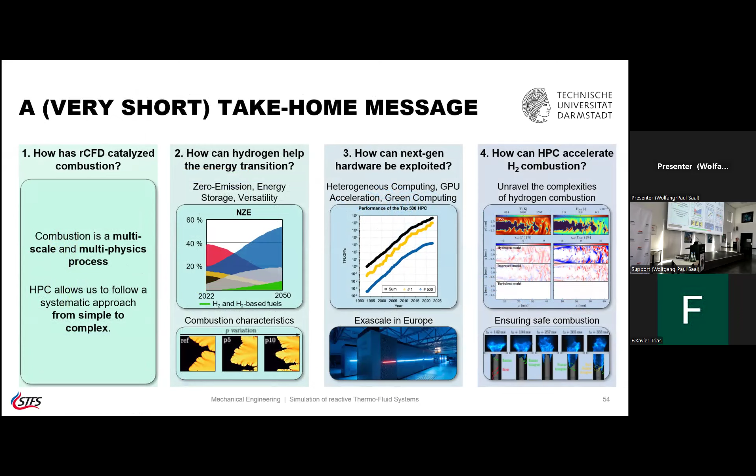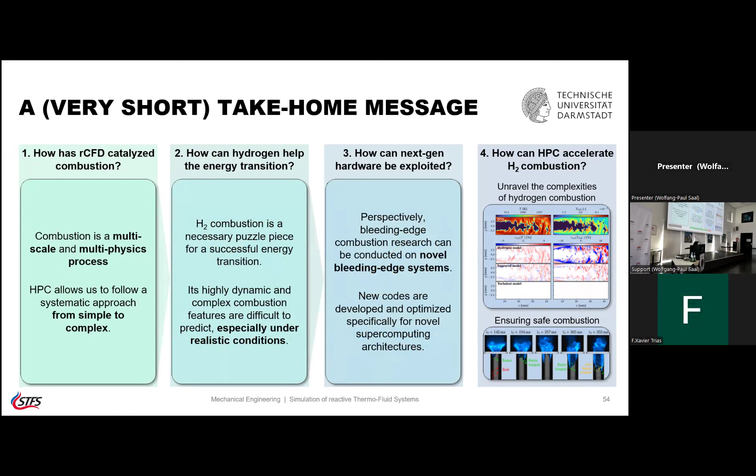HPC allows us to follow a path from simple to complex, build understanding, and do scientific discovery. Hydrogen will be the key puzzle in the successful energy transition. The combustion characteristics are difficult to master, and that's where we need HPC and the next generation of hardware. For this, we need to be on the bleeding edge systems, and we need new codes developed and optimized specifically for novel supercomputing architectures. Then we can also go for scientific discovery.

This is usually the thing we'll mostly do. We want to understand the physics with HPC. But for the first time ever, we can really use supercomputing to bridge the gap between fundamental and applied sciences, because we can bring the DNS into technically relevant conditions. This is a unique chance we have for the next 10 years—not only to do scientific discovery, but also to bridge the gap to something that was unattainable a couple of years back. Well, these were the messages.

I want to briefly share a few other exciting things on the market. I talked about hydrogen. Another thing we're doing is metal fuels—we burn metals. Sounds exotic, but we've known this for a long time. The Ariane 5 booster rockets burn metals because they have high energy density. Fireworks also involve metal burning—you may know from basic chemistry class that metals give certain light emissions.

Now we can use metal powders as a recyclable, zero carbon, high energy density carrier of renewable energy. You burn this like you would coal or biomass—take powder of metal and burn it in a flame. That's an experiment in Darmstadt, and that's a simulation from my group. We're really trying to understand this as it becomes more available.

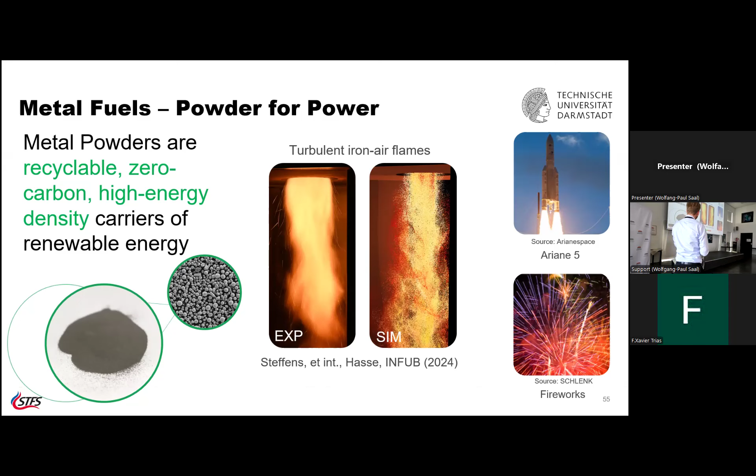The most exciting part is that you don't burn them in air, but in water—they're that reactive. That sounds even more exotic, but what happens is you take a metal, bring it into contact with high temperature steam, oxidize the metal, and get a metal oxide—iron oxide, similar to rust, also a powder—and then you get hydrogen and heat. So you have a reactor: metal powder and water react under high temperature conditions, a couple thousand Kelvin, producing hydrogen, high temperature steam, and heat, usable in a variety of applications. This is gaining a lot of momentum nowadays.

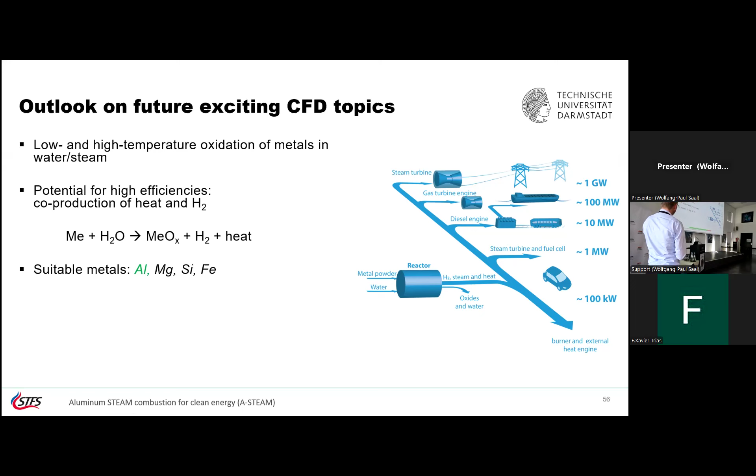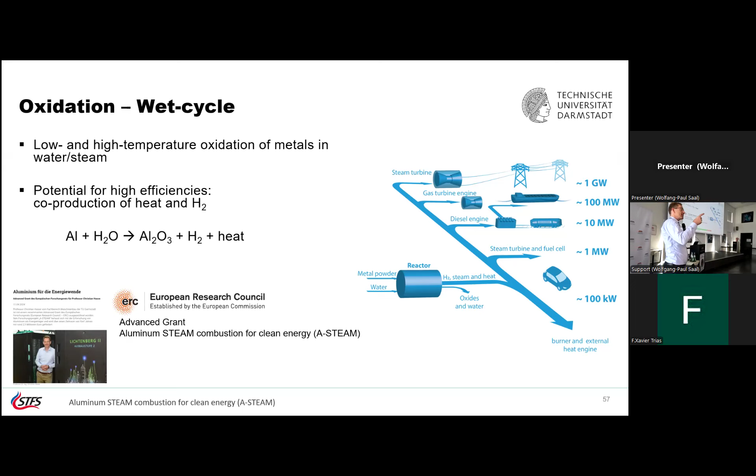I'm particularly looking at aluminum in this context. The ERC thought it valuable to fund this, so we look at aluminum-steam combustion for clean energy. Why do I tell you this? Because this is another example of multiple scales, multiple physics. Let me show you why.

You burn steam and green aluminum in a reactor. What I want to look at is the turbulent flame. What I get out of this is heat and green hydrogen—that's one way of producing green hydrogen if you make the green aluminum with renewable energy. Then you can use it for electricity generation or for chemicals, because we need H2 for that too—you don't want to always burn it, you also need it for the chemical industry.

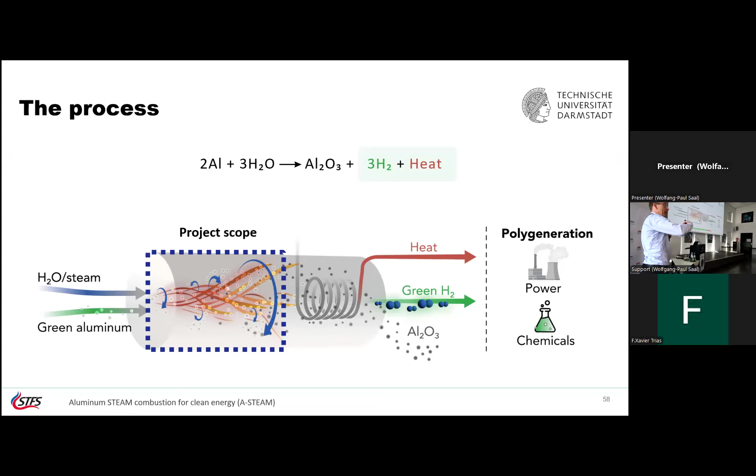Now look at the reactor—that's a meter-size problem. But then you zoom in and you're back on a millimeter scale. You see a metal-air or metal-steam flame with micrometer-sized particles—so you've already made three orders of magnitude. The powder itself is micrometer scale; looking at one particle, you see two non-miscible liquids, attached flames, detached flames, and nanoparticle formation. So a lot of physics happening, but that's on the micrometer scale.

Then you go to the nanoparticles that form there—obviously nanoparticles you have to worry about. And you have to connect all this information to predict again the reactor, so the dynamics on the nanometer scale govern what happens on the meter scale. This is really the challenge, and why we need HPC—we need a systematic approach to bring all of this into a simulation of the reactor. So we're not running out of ideas for where to use HPC resources.